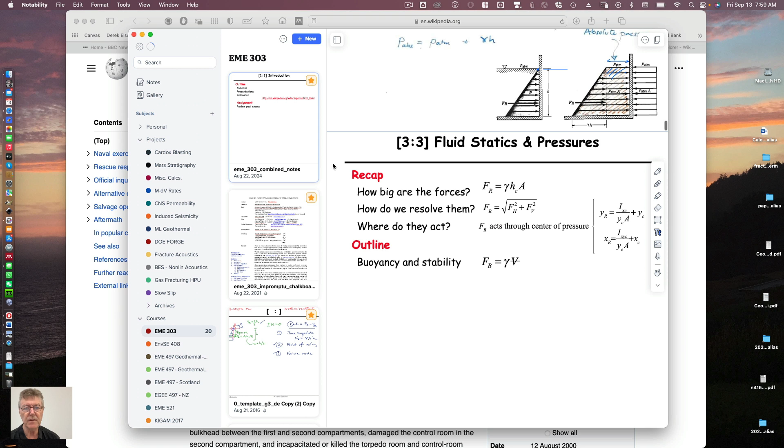Okay. What am I looking at? What's that? Doesn't sound... Yeah, fine. Wrong note. All right.

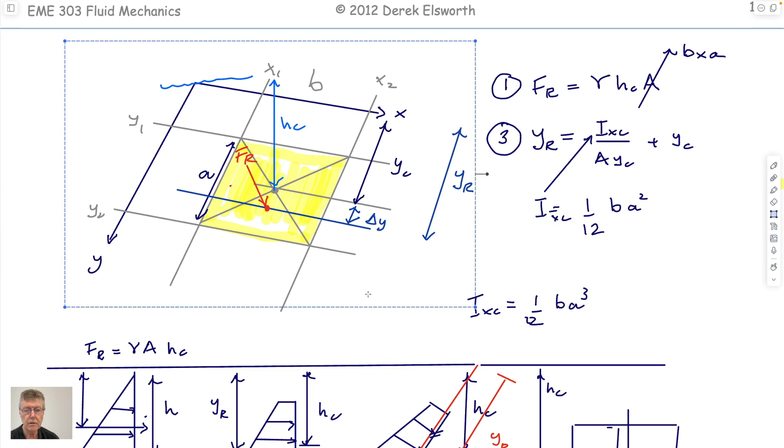So, last time, why don't I do this? It's useful to recap. Maybe I can do this. And I don't want to draw this again. You already have this diagram, but we can talk about it. So I want to do this. I'm getting pretty skillful, don't you think? All right.

Why don't I talk about it in terms of the last thing we actually talked about? So the last example we did, let's just do it from a perspective of what we did. Remember the gate that was hinged at the top, that was vertical, that had a bottom part, if I draw it to perspective, that looked like this. So big picture for this is to, I want to do this. And what else?

Right. So if we look at these individual components, this is the centroid of each of these plates. That is where we use to calculate HC. If it's aligned vertically, then this is YC, because it's in the Y direction. It happens also, if it's vertical, that it's going to be HC as well, right? Because it's vertical. If it's inclined, then YC is not equal to HC, but it is in this particular case. So that's where we calculate the magnitude of the force, and we use this centroid height here.

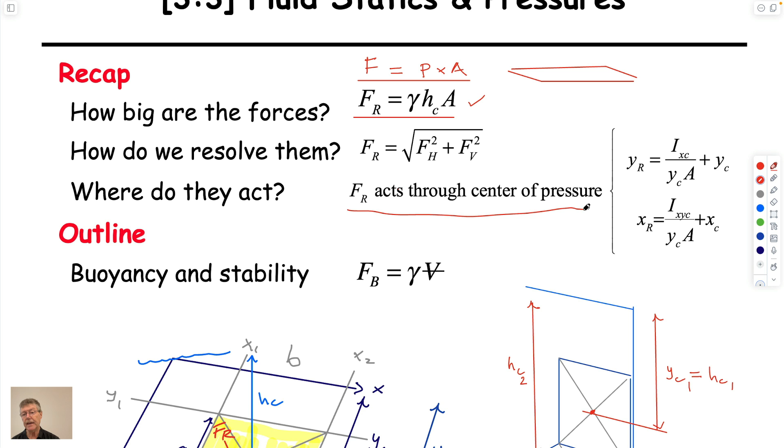In this particular case here, this would be, if this is 1, 1, and this is 2 for plate 2. This is the height to that, so we can calculate the pressures acting on those. And so we have that from this expression here, as you know. But, as we know, it doesn't act through that location. So we have to calculate the center of pressure. The center of pressure is given by YR, which is equal to, I guess, that.

This we can call delta Y, and this whole thing, even though I'm running out of space, is these two things added together. This is YR. And so the location where the force acts horizontally is F1 acts at this point here. Always symmetrically in the middle of the plane, just because you can imagine that there's equal forces acting on either side to try and swivel it. So it's down the center line of this.

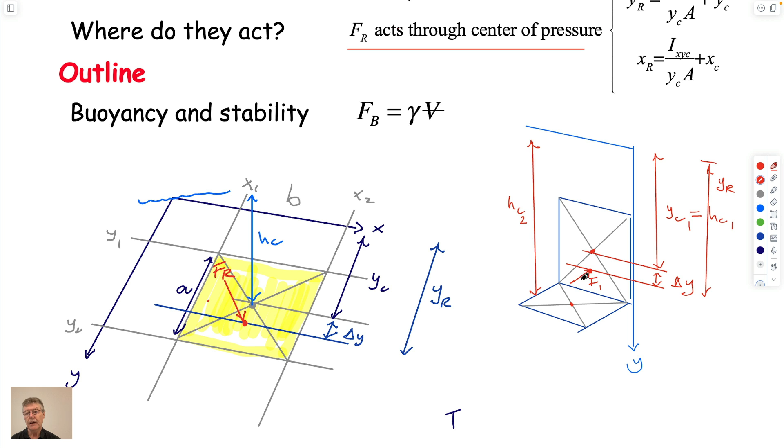And this magnitude of location is given by calculating this, which we can also write, if you like, as YR is equal to, it's already written. I was going to write it in two parts. YR is equal to YC plus delta Y, right? These terms here. Other way around, I suppose.

It will always be below the centroid. This is called the center of pressure, and it's the point where it acts. And we can always calculate it from this expression. If we calculate the magnitude of the force acting vertically at this point, we get force 2 from the location of HC, which is this.

And its point of action will be, as we explained last time, if the Y goes off horizontally to infinity, then on a horizontal surface, actually as we just said in the first expression, whether you have a liquid or a gas acting on this horizontal plate, the force is always equal to the pressure times the area. And for a horizontal plate, the location of action will always actually be the centroid.

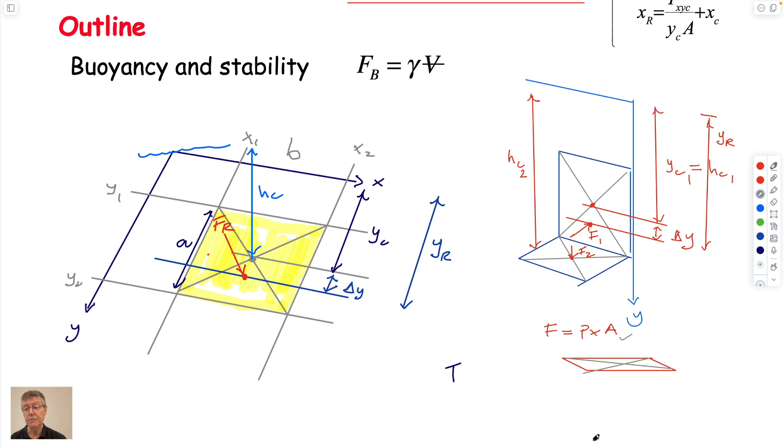So the expression above is what you might need next Friday. It's on the sheet already. You don't need the point of action. We said that it only covers weeks 1 and 2. But we did use force is equal to pressure times area within those weeks. And so that's all we need to know.

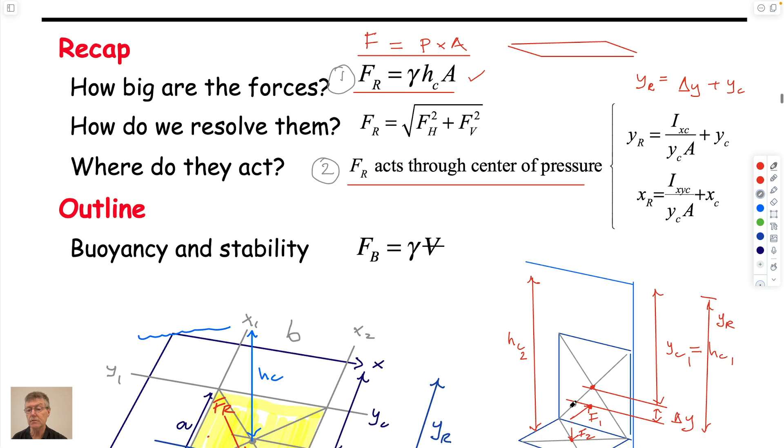And I guess the final thing, so we talked about needing 3 things. 1 is you need to calculate the magnitude of the force. 2, the location of the center of pressure, which is the point where it acts, which is given by this. And I guess the 3rd was a failure mode, if you like, right? And in that example, the failure mode was drawing a pivot that was here.

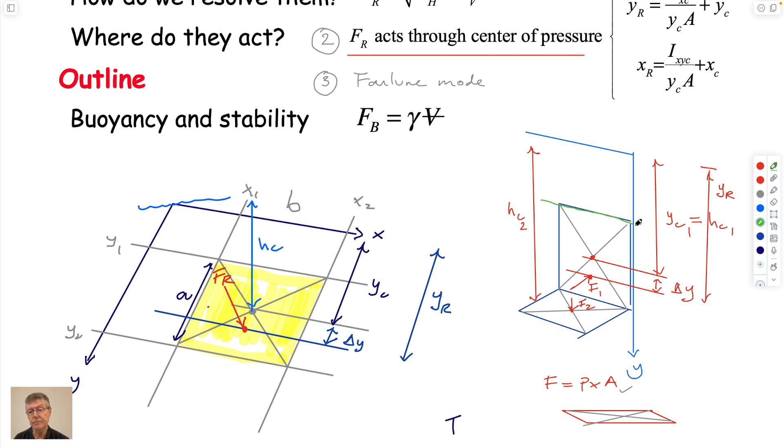And from that pivot point, we could do, quite simply, F1, L1. F2, L2. They both act counterclockwise. So to keep it closed, we need to apply a moment.

And so the moment we need to apply, actually in the question, the moment was applied by having a force in the other direction. It was called P, and it was by LP. I think that was the terminology we needed. So important for this third part is you have to prescribe a mechanism by which it fails. And so P times LP has to be equal to F1 times L1 plus F2 times L2. That's in a nutshell what we're trying to do.

I always worry about whether what I'm going to do now will confuse you. So if this makes your head explode, then don't worry about it. But to misuse the expression, there's more than one way to skin a cat, wherever that comes from, I'm never quite sure, is that we could solve that problem in a variety of different ways.

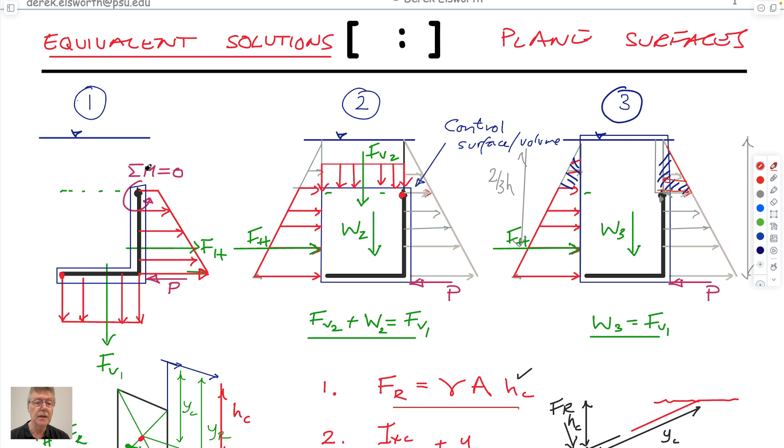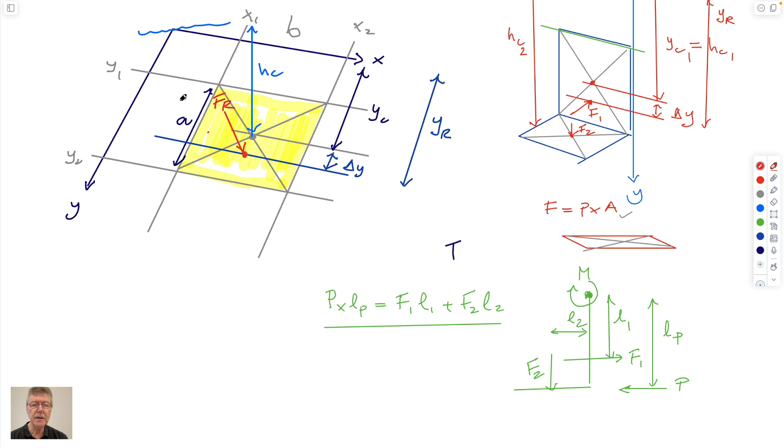Free body diagrams are our solution. Perhaps you thought that after statics you'd never use them again, but certainly in what we do in this class, it's kind of throughout what we attempt to do. So don't get hung up on that. It's just an aside, but only to make the point there are multiple ways to solve these problems. So these are the fundamental equations that we need.

We'll talk a bit about curved surfaces, and then after that we'll talk about buoyancy.

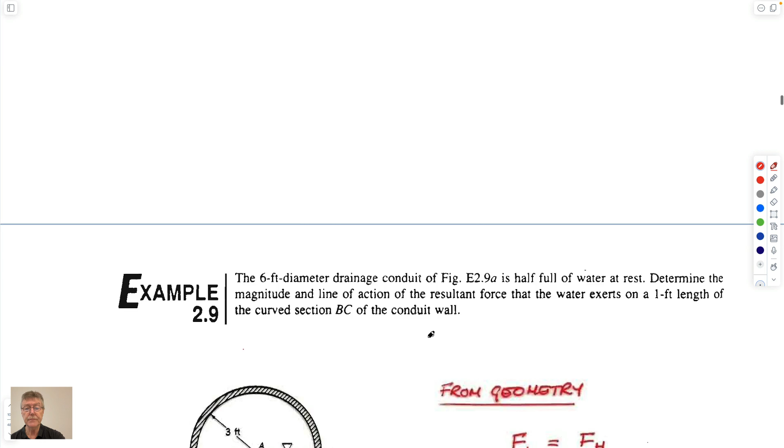These are super contrived problems. This is a stupid problem, but let's just quickly look at what it would be. Why would we want to divide a drainage conduit into half and look at the forces? Well, we might want to do it just because we can.

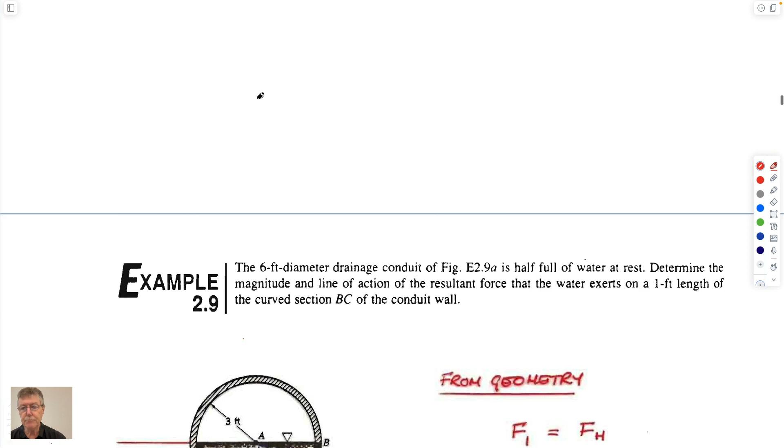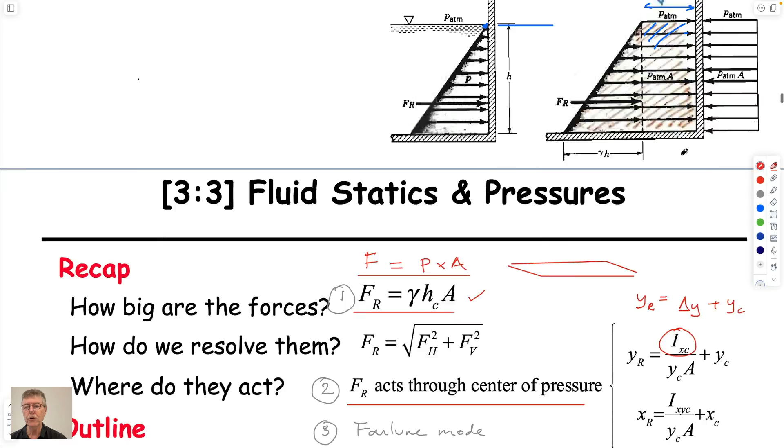So here's a static fluid in a circular section. I guess before we do that, I didn't mention, these are standard results. This is the second moment of area around the centroid, and they happen to conform to standard results, which you have in your book. If they're on a test, not on this test, but if they're on a test in the future, you'll have seen that these turn up in the question. So for a circle, it's a standard result.

For a plate, which is a much more usual one, we've used this already, it's a standard result. The centroid is always located directly in the middle. The centroid is a third up from a triangular distribution, from what we talked about before. It's a third up from every side, actually, as you know. And it's 4r over 3 pi up for a circle.

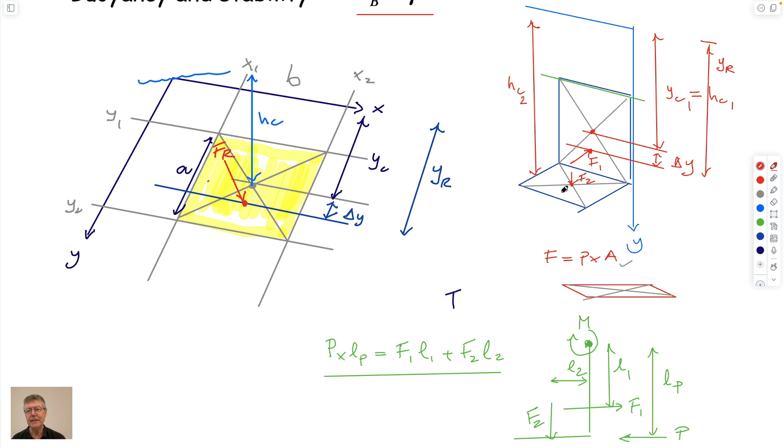So this is the point which would be the center of mass. If you have a circular disc and you're balancing it on your finger, the point that you'd balance it on would be this point here, the centroid in each case. And this would conform exactly to this gray-lined point in the middle of our plate. That's the center which the plate balances around. The point where the pressure distribution balances around, if you put it on my finger, is actually this other point. But perhaps that's confusing to talk about it. Egghead professor stuff. So these are standard results.

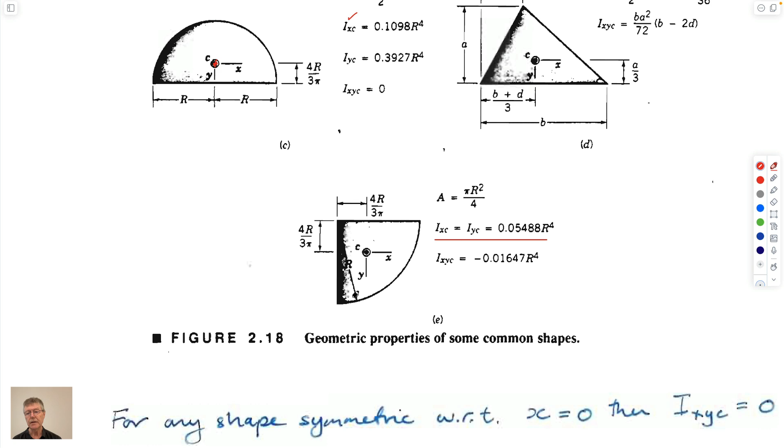So these are the terms that we typically use, we've used already, and that are in your book, and that we may wish to use in the future. Actually, we need to use this one now, right? So we know that this is equal to—actually, we don't need this, we need this one. So the balance point of this distribution is 4r over 3 pi in from the sides and the top, and we'll need that to be able to solve this next problem.

All right, so if we're stupid enough to want to do this, we want to calculate what the resultant force is that acts through this system. How do we do that? Well, we make a free body diagram, we cut it off. If we cut it off, then the pressure distribution on this side will look like this.

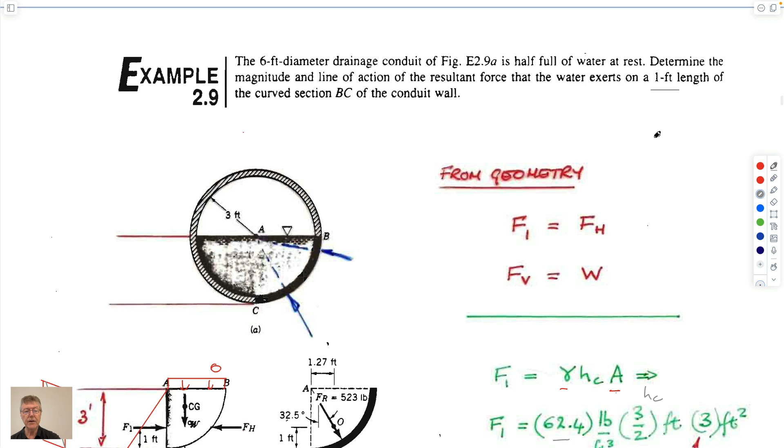This is what that looks like. I'll use gray again to draw the locations. So this is HC. HC is equal to 1.5 feet. Unit weight of water, never like these English units, 62.4 pounds per cubic foot. And the area, I think, is a 1 foot length. So the area here is 1 foot by 3 feet, which is this. Multiply those out, you end up with pounds.

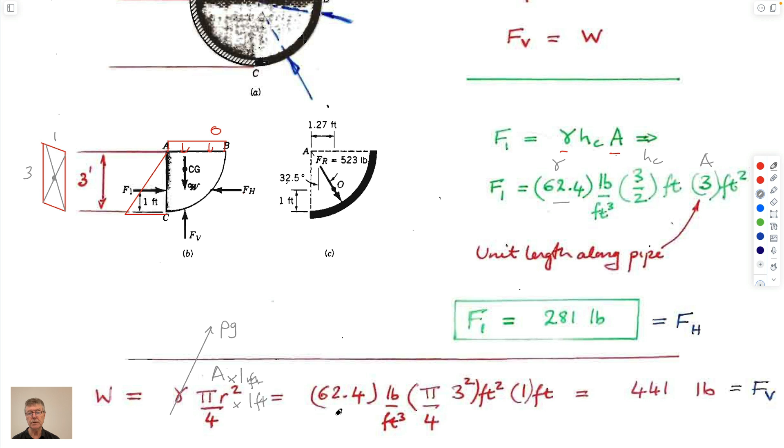The weight acting downwards is the unit weight. So this unit weight, as you know, is rho g. The area of a quarter circle is pi r squared divided by 4, times 1 foot into the page. And that equals whatever this is, 440 pounds, which is FV.

If we want to then take those magnitudes, we have FH, and we have FV, which is W. I guess if we had a superposed pressure on the top, which we don't, then we'd have something else. And so we know from those that we can use Pythagoras just to calculate the resultant of those two vectors, which is this, and we get FR.

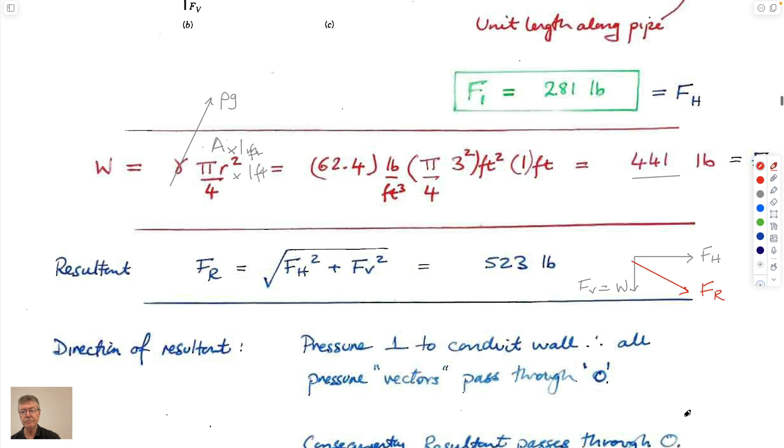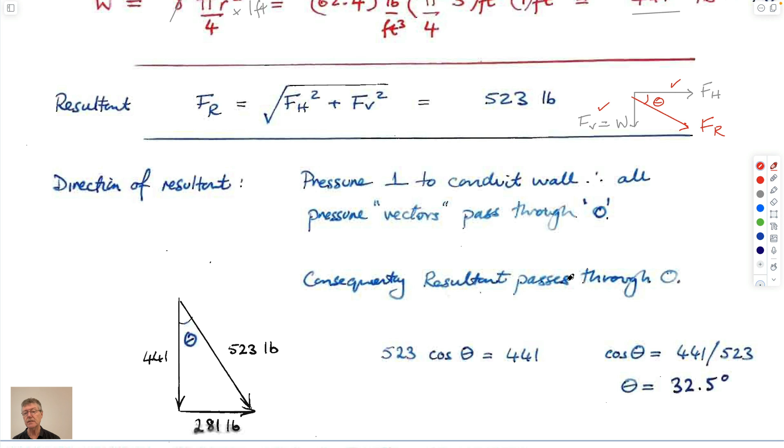And if we wanted to, from those, we would be able to calculate exactly what this angle is, just from sines and cosines, because we know this length and we know this length, and we can calculate this, and so the direction in which it acts is this. And if you wanted to, you could take these two forces and take moments around this central point, and you'd find out they exactly balance. So the resultant actually goes through this central point. I don't think that's an important thing for us to do here, but the rationalization of why that happens is that we know that pressures act normal to this surface.

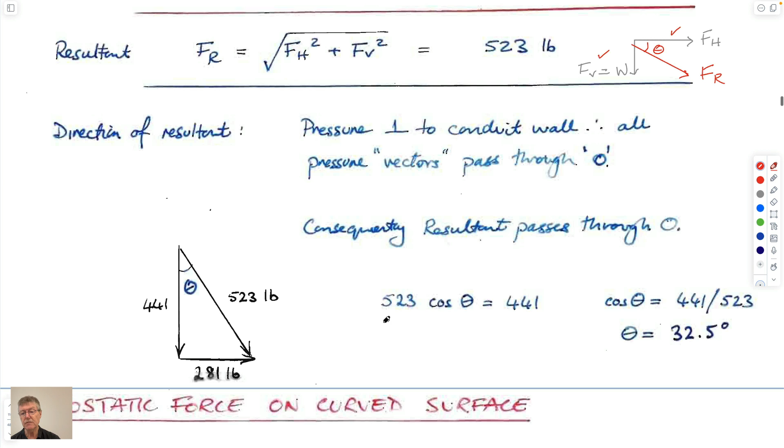And so all those pressures physically act by definition through this point here. So it acts at an angle which is defined by this, and we can calculate it using this expression here, just from these different lengths, and pull it out. So we know in this case that it acts through here, and we know that it acts at some angle, where this is the angle that we've just calculated here.

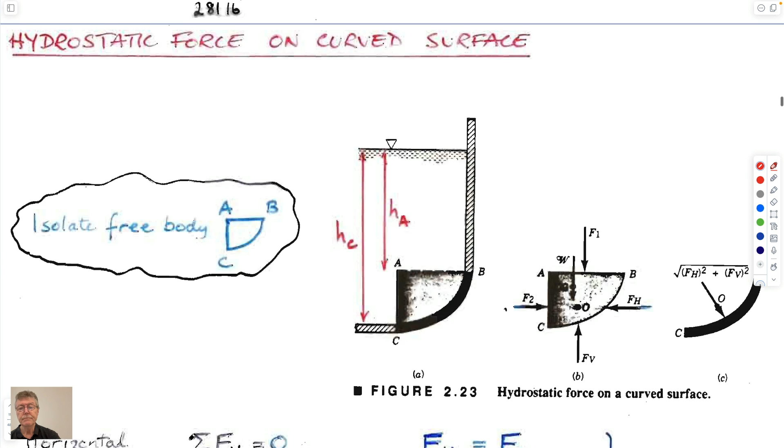If we want to do something fancier, I don't know whether I want to do this either. All we would do, actually it's just the same as the example we did before. Here we decided that we could solve this problem by looking at weights that are acting, and this weight has a pressure that's acting on top of it.

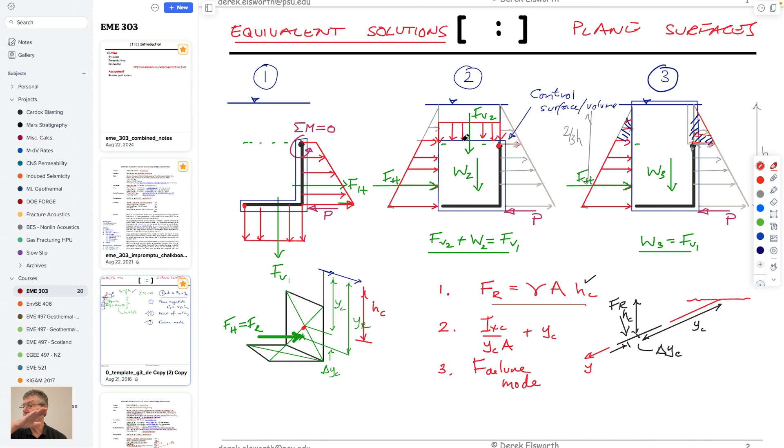We could solve this one with a curved surface, where instead of this right-angled gate, we have a curved surface. We have to calculate the weight of the fluid according to the cross-sectional area of the quarter circle. We have a pressure acting above it, which we can calculate what that vertical force is, because this is just going to be equal to the height of the centroid, which would be this depth here, times the unit weight, times the area on looking downwards in plan view. And we could use that to solve this problem. So I'm not going to do that.

So the relevance of this is that so-called tainter gates are structures that control water behind impoundments, sometimes in dams, sometimes this was at Bay of Fundy in Nova Scotia, as it turned out, many, many years ago, hence a black photocopy. But this is the gate, a very flimsy structure. You can see that these stanchions go to a hinge point somewhere in the future. It's got a very light covering, and this sluice just goes down to close off the flow.

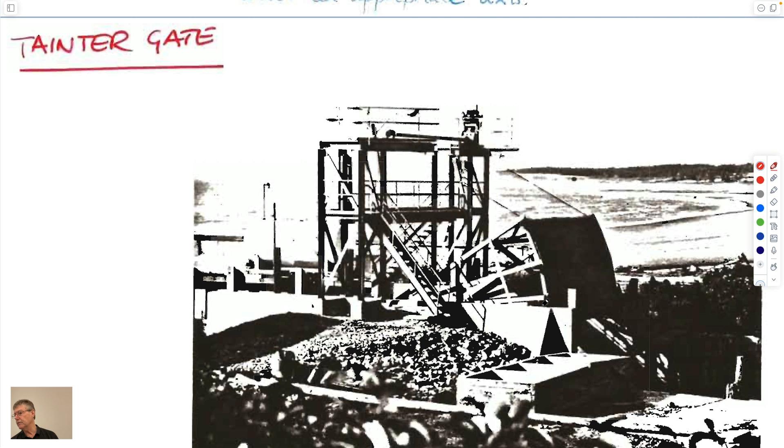And because when you have the pressure acting on the back of this gate, acting normally to this, it can be a very flimsy structure, and it works around a pivot point, but this can be a very light structure to be able to do that. And it can be a light structure including this because there's no net moment on this, because if everything is acting through this fulcrum, there is no moment that's applied on this. So you don't have to fight against it to raise it. You can raise it quite easily, raise it and lower it quite easily. Don't want to talk about that. These are too dangerous. Okay.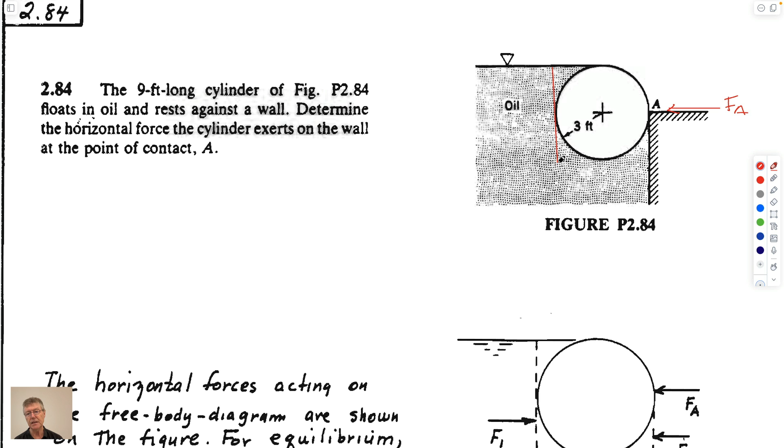I can see from below it's called FA. There's going to be a force on the other side. What you could do is easily just do this, as they've done below. And if you do that, then we can isolate this in terms of our free bodies.

Don't care about vertical in this particular case. It's a horizontal force, so vertical forces are orthogonal and have no influence. This is the force exerted by the wall pushing this back. You can imagine there's a bigger force on the left because we have a big force diagram. So what's the force on the right-hand side?

Is it this? No. Or is it... getting fancy here, right? Or is it this? So if this and this are the same, then this would be the pressure distribution we have.

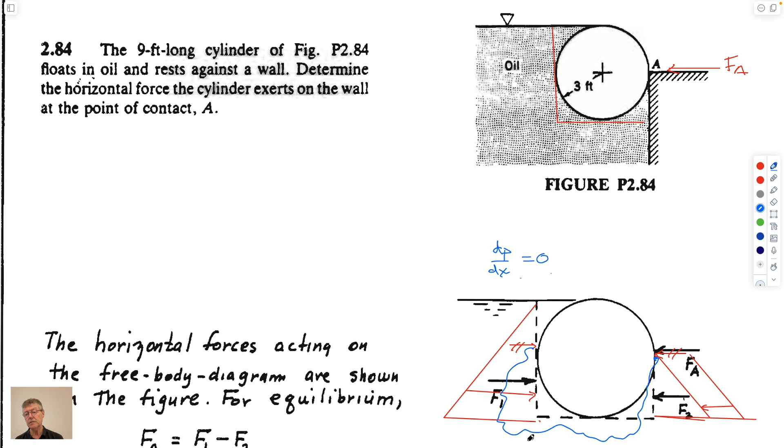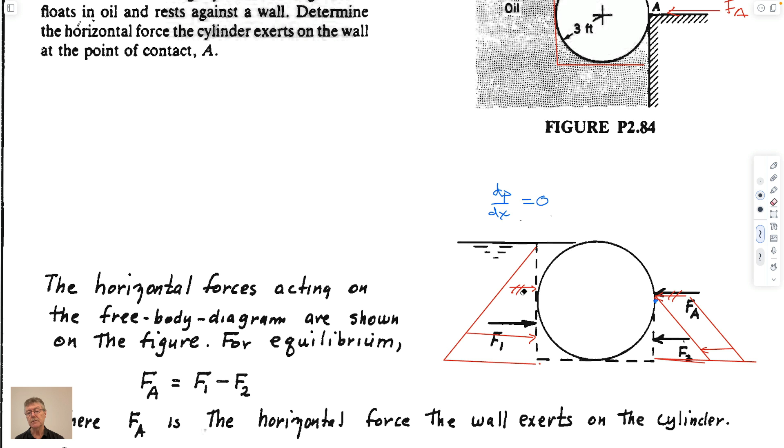It would be enticing at first thought to look at this pressure here and think, well, it's atmospheric above here, so it has to be atmospheric at this point. But what we do know is that if you go from this location to this location, they're exactly the same elevation. We know this expression says, just like the manometer equations, any location at the same elevation has to be the same pressure in a static fluid, and we can get from location one to the other this way. So the bottom line is that the magnitude of this pressure on this diagram has to be the same as this magnitude here.

You can solve it in a variety of different ways, but one straightforward way would be to think of this force as acting on a plate like this, where I do this. So you have HC and you have YR defined. The other one would be a plate, which I'm running out of space for, but would look like this - I'm not sure whether I can do the drawing justice. The plate would look... the vertical axis would look like this.

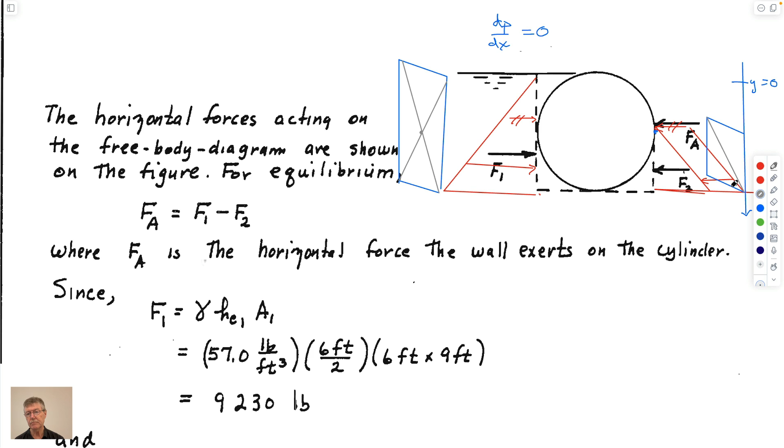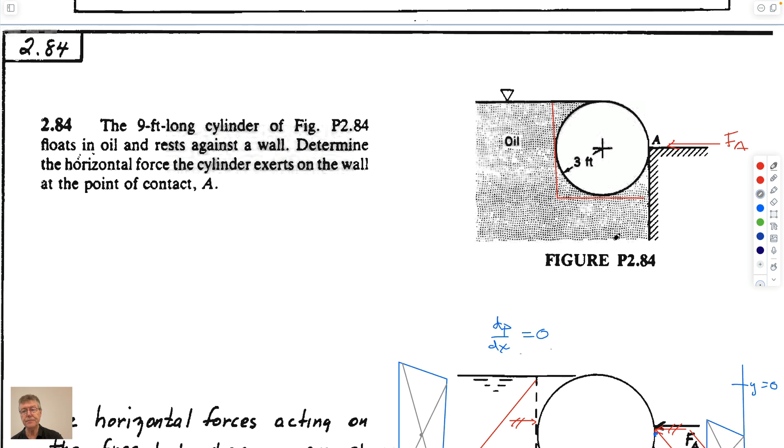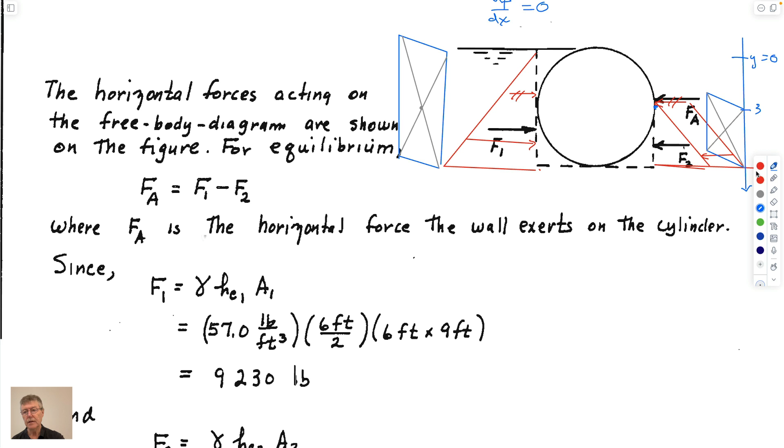Y equals 0, and the plate would look like... can you see this? So again, this would be below the surface. So what would the magnitudes be on this? The dimensions are: this is 3 feet, this is 3 feet, and this is 3 feet, etc. So if I put this on, this would be y equals 3. This would be y equals 6. I don't know where this has gone - where's my colors gone? Oh no. And this would be 4.5.

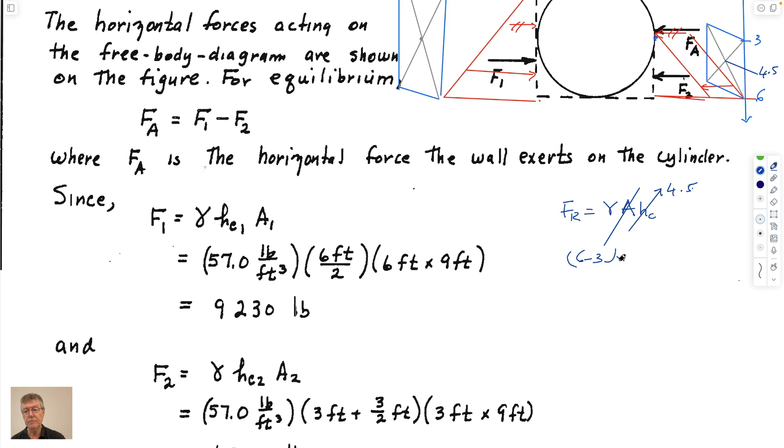So the resultant force would be equal to the unit weight of oil times the area times HC, and HC is 4.5. This would give you the correct magnitude. And what would A be? A would be 6 minus 3 feet, which is this height here, multiplied by the width into the page, 9 feet long.

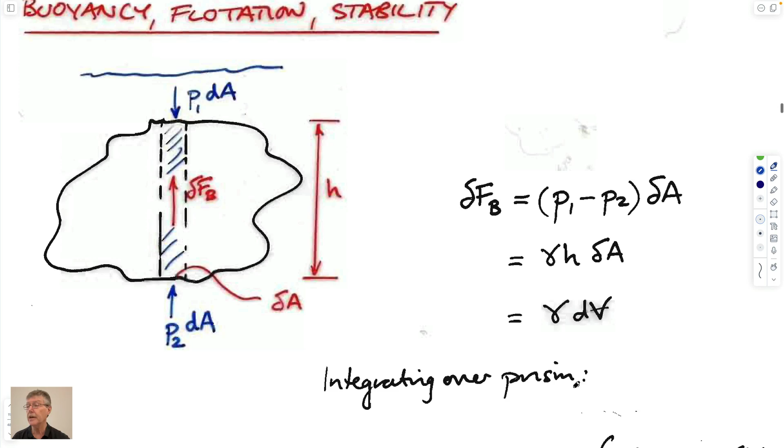Make sense? So you just have to figure out how to dissect these problems. Too much information again, showing that you can solve problems in lots of different ways - too complicated for what we want to do here. So there are lots of different ways to solve it. The only way you get a lead on this, I guess, is practicing it. You'll practice it in homework, so you'll get some chances to practice this.

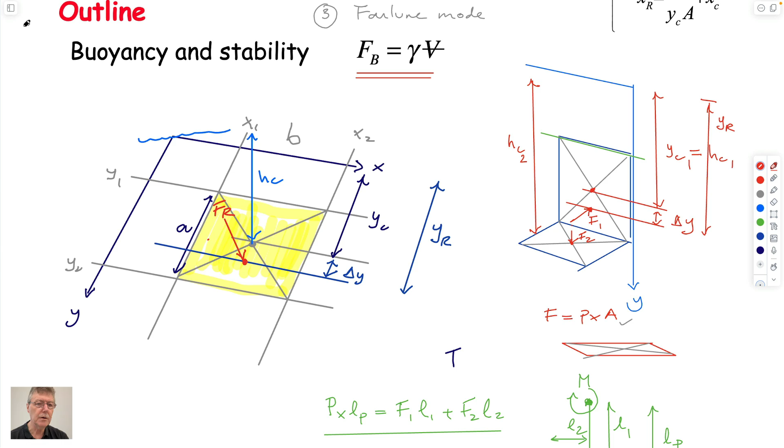The last thing to deal with then is to talk about buoyancy. If you came in late, well, why don't we go back - we have a bit of time. Where was it? U-tube.

So how does a submarine work? You obviously know how a submarine works - you go down, you take on water as ballast, you sink as a result of that ballast. You have it in your tanks. You have compressed air or some ability to store air, and you use that air to evacuate the ballast. The submarine is now less heavy and therefore is able to float by its buoyant weight, because all the people living inside are living in an environment at atmospheric pressure. We won't talk about that anymore - that's exactly how submarines work.

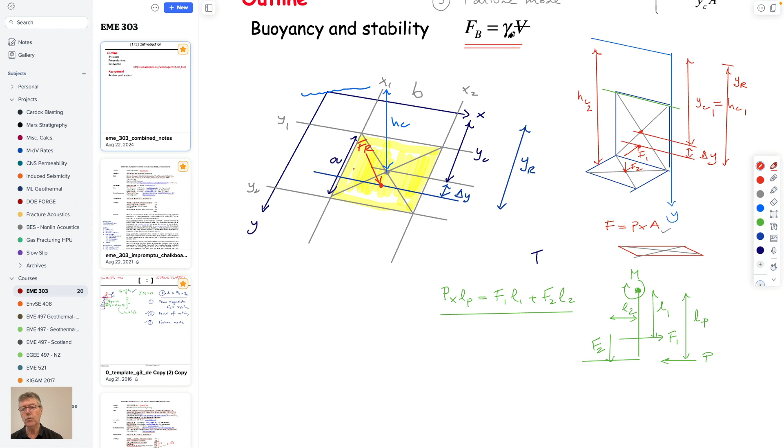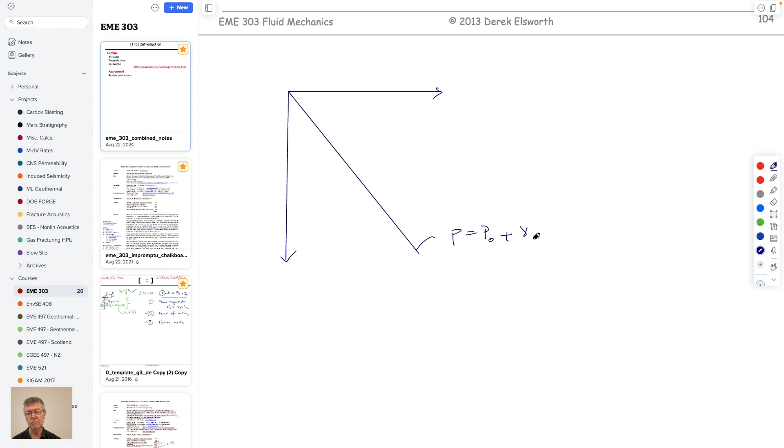So how does buoyancy work? You might know Archimedes' principle, that the buoyant force is equal to unit weight times its volume. It's quite easy to show that - the easiest way is by just doing this. We know that if we're working in our XY coordinate system, pressures change as a function P equals P0 plus gamma y, in this case, if this is y and this is pressure. If we do it differently, if we have pressures at two different heights, we have exactly this: P1, Y1, Y2, P1, P2.

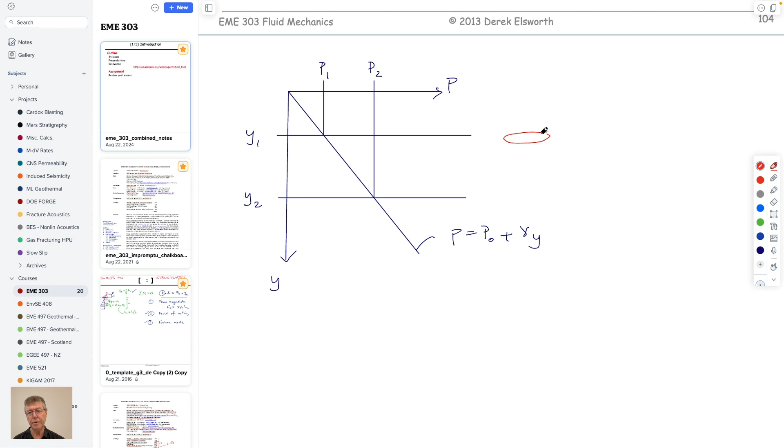And we can think about... do a circle. I like buckets. We have a bucket of fluid which has some weight W, has some cross-sectional area A. We have pressure acting on this, which is P1. We know that F1 equals P1 times A from what we talked about.

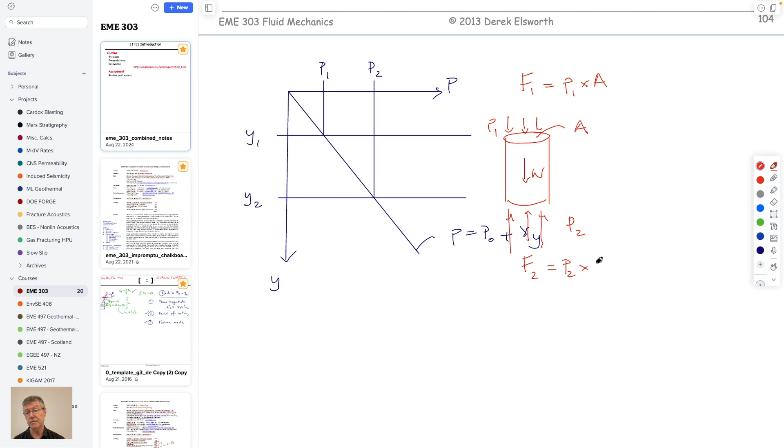We have a pressure acting upwards, which is larger, which is P2. And F2 is equal to P2 times same A. And we know from what we understand about statics is that F1 plus W is equal to F2. So F2 minus F1 has to be equal to W.

And we could think about this. This weight is why these pressures are able to be different. It's the same as we talked about stacking buckets to get to the height of Everest. You take fluid in a bucket, you calculate what the weight of the bucket is, and that force is what's holding it up. If you divide that force by the area, that's the pressure underneath it. If you add another bucket on top and another bucket on top, then this is exactly what you get.

And so if you take this weight away, if you can magically wrap it in a weightless membrane and take this water away, then all of a sudden it's not going to be in balance anymore. And so we could write this out as equal to P2 minus P1 times A. And we know that P1 is equal to gamma Y1. So this is also gamma (Y2 minus Y1) times A, which is W.

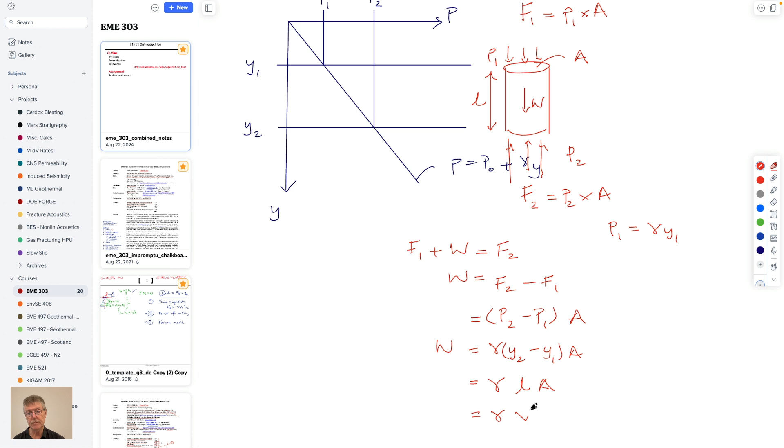And this is also equal to the unit weight times height times area. Should I use height? Perhaps I shouldn't. Let's use L. Right. If you subtract Y1 from Y2, Y2 is bigger, so this is L times A, and this is just equal to unit weight times volume. So this is the force that's keeping it in place. So this is just a static fluid that's fluid all through it.

So we encase this volume with a membrane, and miraculously we take the water out of it without the flexible membrane collapsing. And then it's going to be out of equilibrium. The magnitude it's going to be out of equilibrium is equal to the buoyant force. So W is holding it down. You take W out, it's no longer there. The net force acting upwards on it is going to be the buoyant force. Buoyant force always acts upwards. Always acts against gravity, officially, if you want to be pedantic about it. But for us, that's upwards. And so that's exactly what this expression is here.

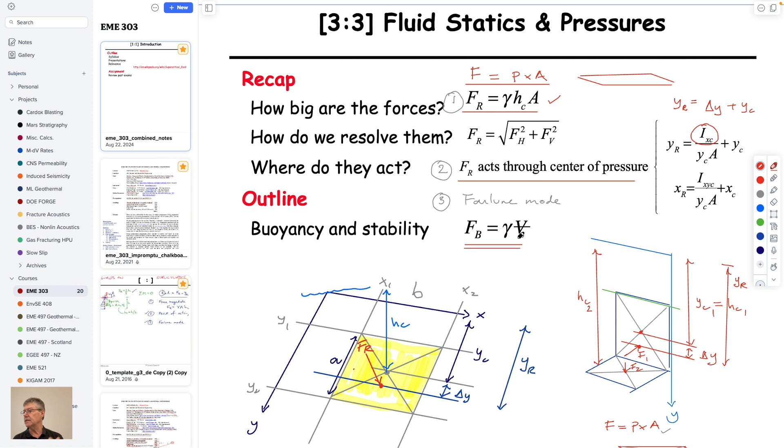And so if you know what the volume is of the submarine, if you know what the unit weight of the fluid is that's surrounding it, not the unit weight of the fluid that's in the submarine, but the water that's around it, then you know what the buoyant force is. And so if you take on weight in the submarine, then that would act against the buoyant force to keep the submarine down. So that's it. Simple. Pretty straightforward. Well, I think I've seen it a few times, so it's straightforward to me, it seems.

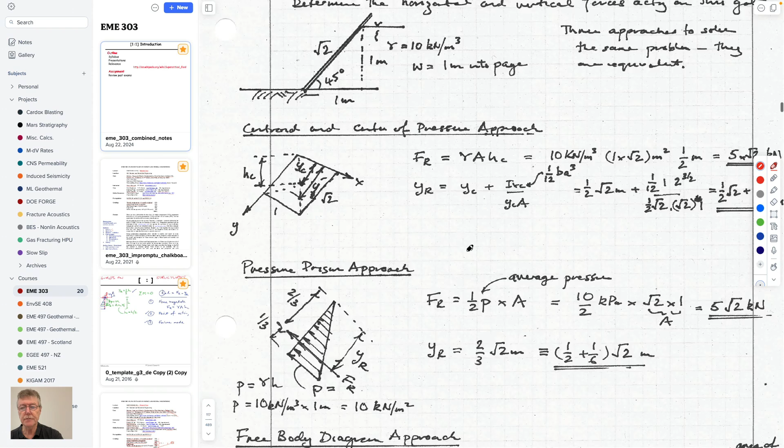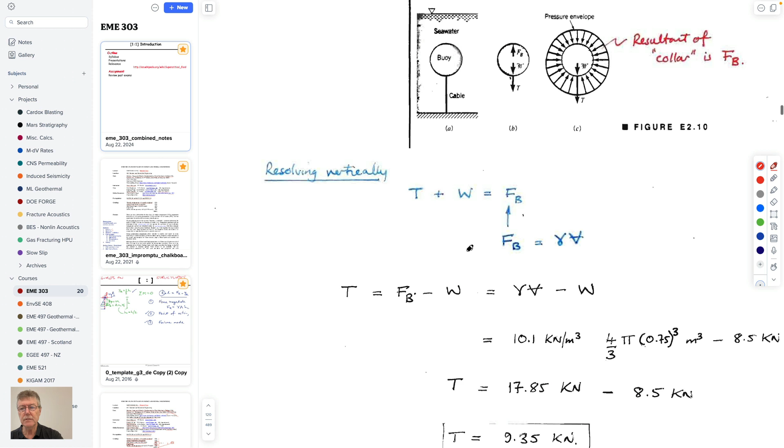This same analysis, blah, blah, blah. And so let's do a quick example and then talk about stability. So the quick example is this. From the book, which hopefully you have. So you have a buoy, and it has some weight to it. So if you took the buoy and carried it on shore, this big orange thing you're staggering around with has some weight to it that you have to hold. And so that's this W here.

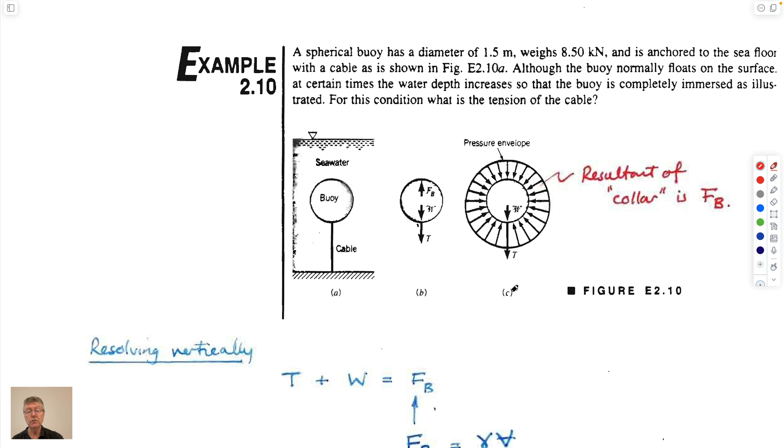And you put it underwater, you tether it with a cable, and you want to calculate what the force is that you have to tether it with to be able to hold it in place below the surface. And so it's just a force balance, right? Forces acting downwards are the tension in the cable and the weight of the buoy. Forces acting upwards are the buoyant force. The weight we have; the buoyant force is equal to the volume of the buoy multiplied by the unit weight of water.

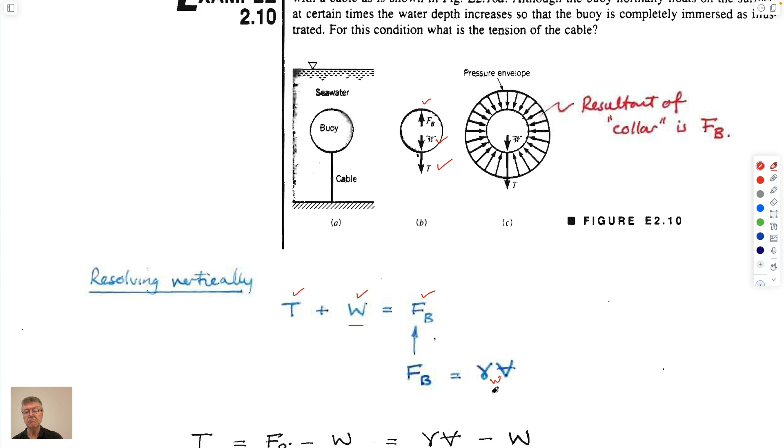And what we'd like to solve for is this. So we just rearrange it. Unit weight of water times the volume, seawater I guess in this case. Fresh water would be 9.81. Seawater, I think it's given in the question. Or perhaps not. Seafloor, yeah, fine. That's a minor wrinkle.

So 9.81 or 10.1. This is the volume of a sphere of radius 0.75 meters. And this is the weight that you're given, which is the weight of the big buoy. Not in terms of kilograms, but in terms of adding apples to apples. So everything is in newtons or kilonewtons, and you have to add them together, and you come up with this magnitude.

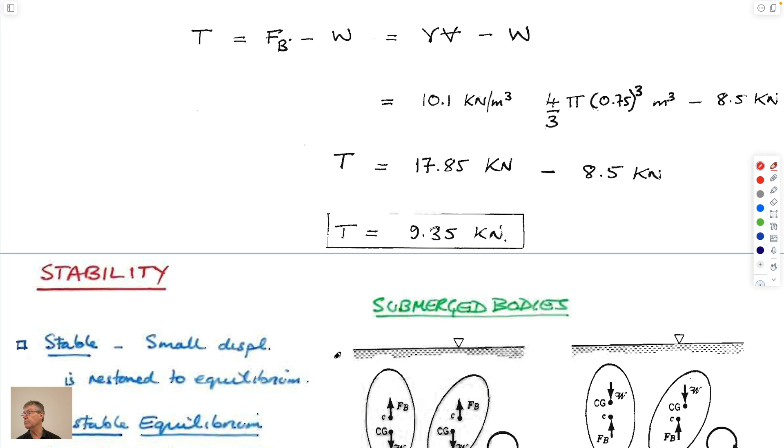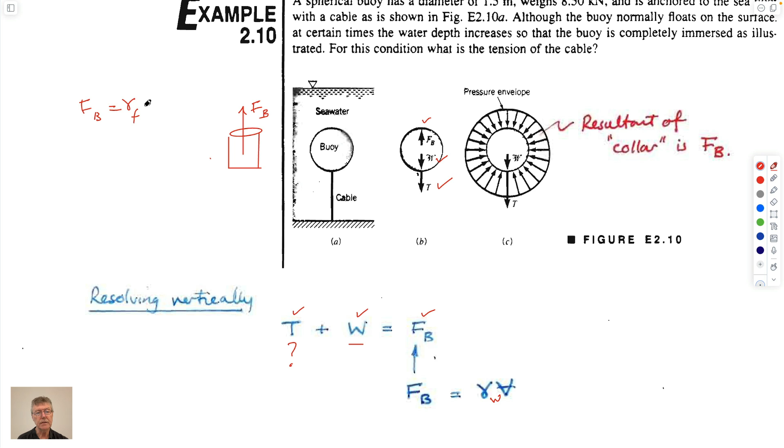It's worthwhile noting that, again, the little wrinkles on these questions, if this was our cylinder, didn't draw that very well, but you get the idea. If this is our cylinder, then the buoyant force is equal to what we said, the unit weight of water, or the fluid, multiplied by the volume.

And so in the way that we derived this, if we go back here, how far did we go back? Jeez. If the pressure acting on this surface relative to this magnitude here, the differences in these two pressures, is constant for a given height. So if you move this down, so maybe until it was at this depth here, the top, then the bottom would be at this depth here,

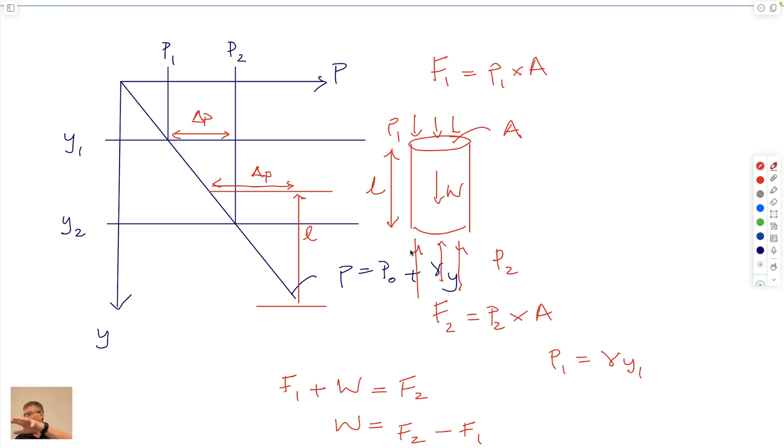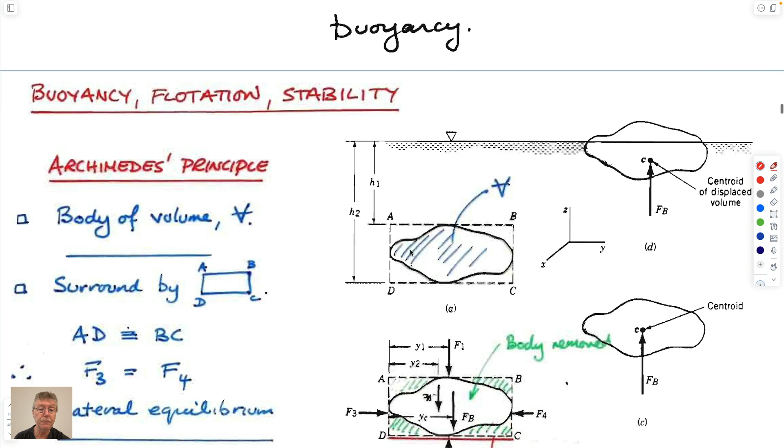then we'd know that the change in pressure between, this is still what we've called L, so I've just shifted it down, and now this magnitude of delta P is the same, right? This is delta P, this is delta P. This is the difference between the pressure on the top and the bottom. As we've translated it down, the height of the buoy hasn't changed, and so you'd expect that if you moved this buoy down, then it would still be the same buoyant force. That's why the buoyant force doesn't change as you go down in depth.

So in other words, if I was too clever for my own good, and I took this and moved it down here, the buoyant force doesn't change, because it has the same differential in pressure acting up. And the best way to think about it is that you're removing water, and really it's that volume of water, that mass of water, which is providing the weight in newtons that's holding this thing down. And so if you remove that mass of water, then that's the equivalent buoyant force that's rising.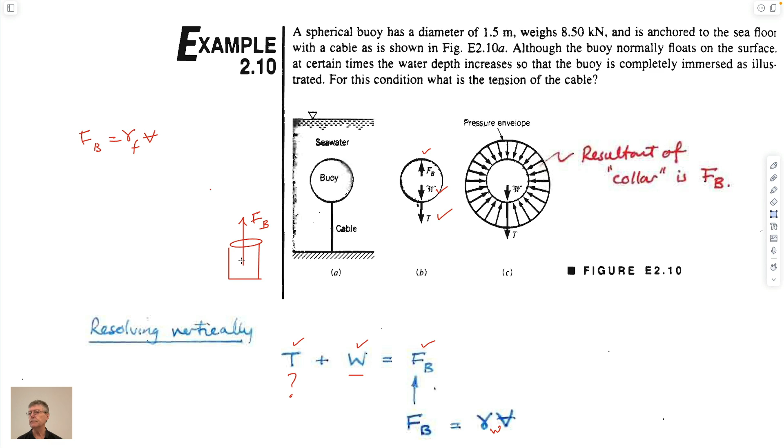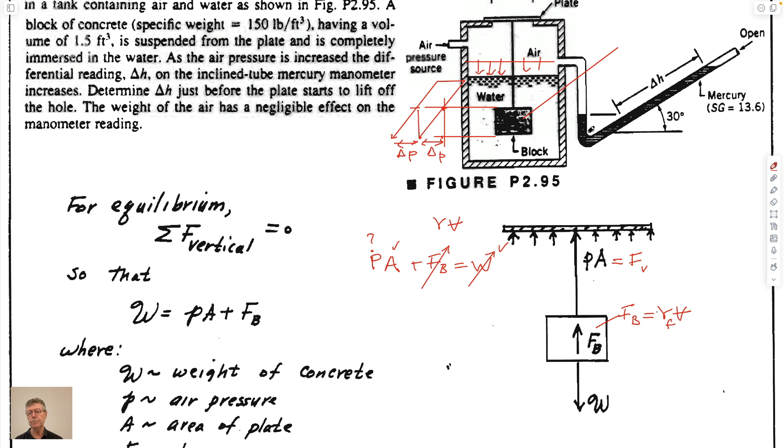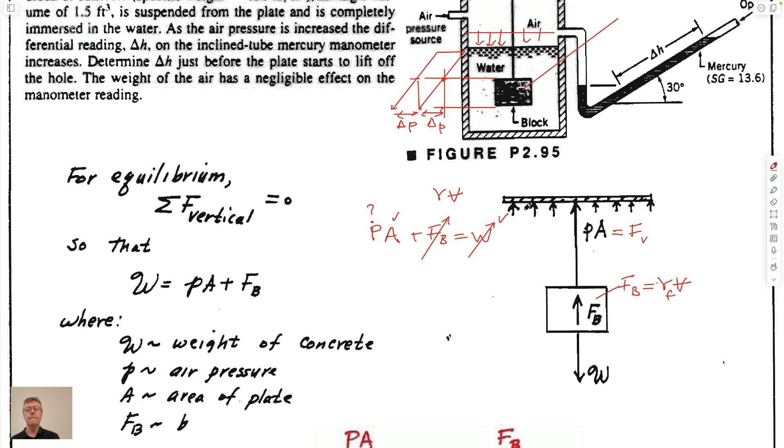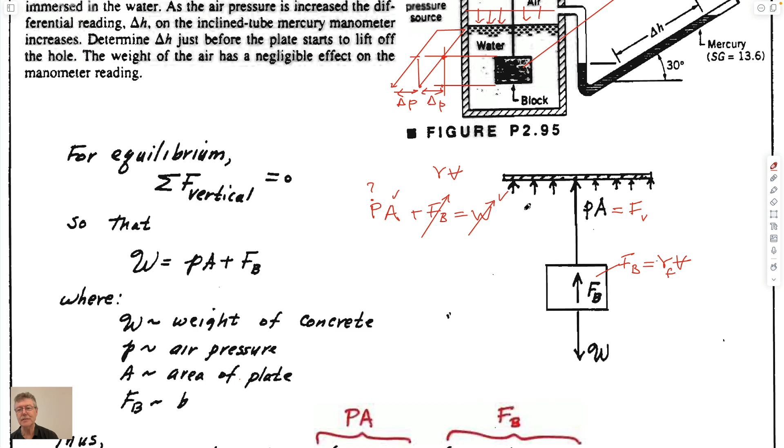And then when you want to solve for the pressure, it just makes it difficult for you because it wants you to just solve the manometer equation, but that's basically it. So that's buoyancy, pretty straightforward. Well, I shouldn't be so condescending to say that. If it's the first time you're seeing it, then it's perhaps not so straightforward. But you can always calculate these things. It's really getting the recipe. So one thing is to understand the expressions, but the other thing is to be able to apply them.

So that's buoyancy. Buoyancy is always given by the unit weight times the volume that's displaced of the fluid that surrounds an object. Whether it's an empty object with air inside or a solid object with solid inside, they both apply. The other interesting thing in talking about buoyancy is stability. We all know that if you have a sailboat, you put a lead keel in it so that it stands upright when the wind's blowing, and that is a problem in stability. And so we can look at how stable objects would be that are buoyant.

The first ones we can look at are the simplest ones, which are fully submerged, like a submarine. So if this was a submarine and we had lead in the bottom of the submarine, then the center of gravity of the submarine would be displaced downwards below its midpoint. The center of buoyancy, where the buoyant force acts, is always the centroid of the volume.

So the analogy with our, bless you.

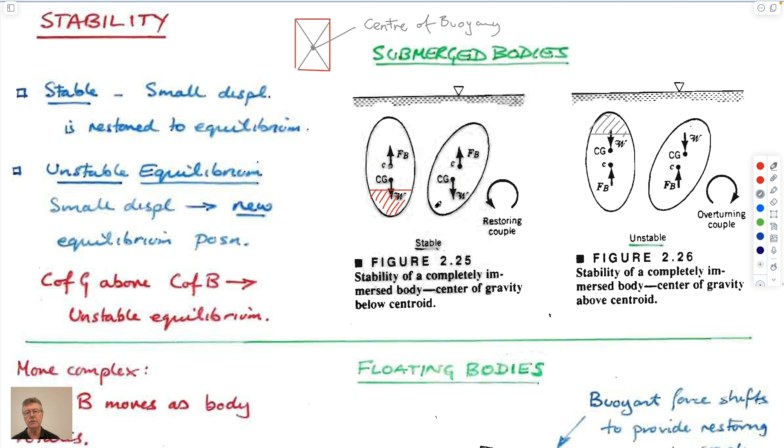That's the easier one. The more difficult one is when you have a free surface, because the center of buoyancy depends on the submerged profile. So the submerged profile for the center of buoyancy in this case is this, and in this case is this. So clearly, if this is changing as it rotates, then the center of gravity isn't going to change for this figure, but the center of buoyancy is going to change because it's the balance point of this gray cross-sectional area.

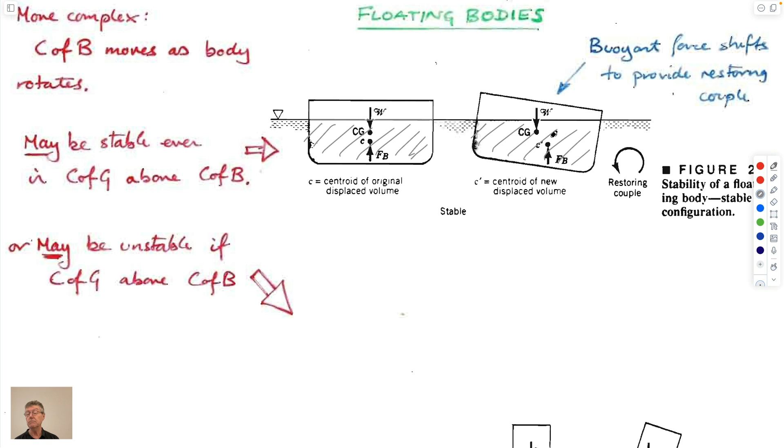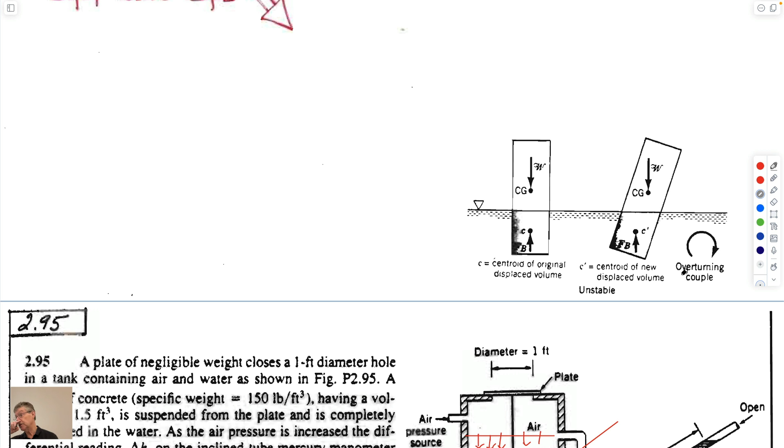So again, the same principles apply. If you have a wide boat and you twist it, now the center of buoyancy tries to restore it, doesn't capsize. If you imagine having a boat which is sitting like this, if you twist it, the center of gravity for the weight is above the center of buoyancy and offset, and so it will try and overturn it, just like the Costa Concordia that we looked at. Okay, so that's it.

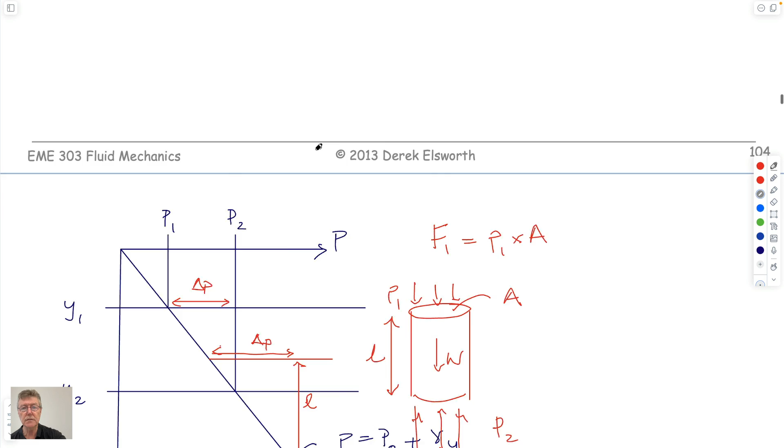So the expressions for this week are the ones on that first sheet. That's all you need. You don't need those for next week, as you know. I'll say a few things about the test. If there are questions, I'm happy to answer them. But from this week, these are the fundamental expressions that you need. So these will turn up in a future incarnation of what we deal with in tests.

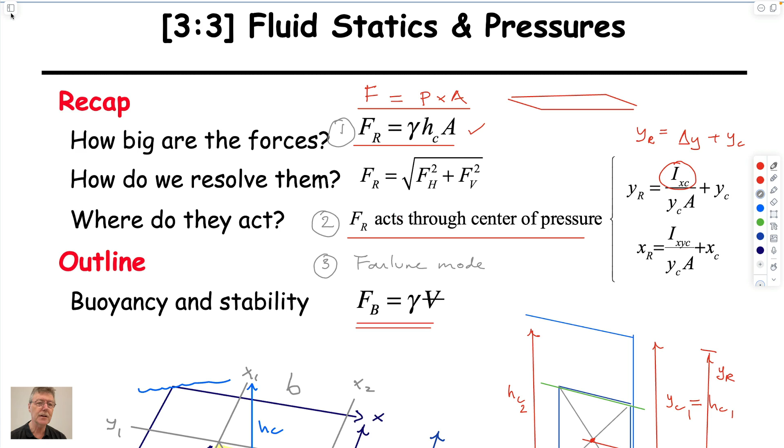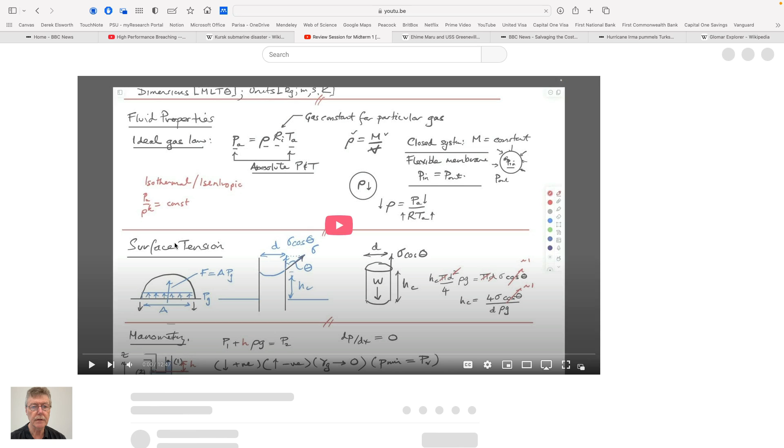Test. Well, I will do this actually and record it for those who... I still get questions as to what is happening for the test, even though we've kind of talked about it. You know, if you're here, that our test review is online. And so you can review that. You have some idea of what it's about.

It's in this classroom. It's on Monday and Wednesday and Friday. There are three different sets of questions on those days. You might get here early. They might start things up at 7:55 if you arrive here. The couple of people who are doing this in quiet circumstances, because they're allowed to by the university, will get it served to them on Canvas. That will also open at 7:55. It's a 30-minute test. It'll stop at 8:30 or 8:31.

Each question, just like the post-COVID questions from 2020 onwards, is a question with sub-questions which hopefully don't lead on from each other. They're not multiple choice mainly. There might be one or two out of the 6 to 8 on a single test, but most of them are calculations to put in a box. You're asked to put those calculations in particular units. You'll have the test and an equation sheet. The equation sheet is the bottom of this video, which you'll get verbatim. The back of it you can use as scratch paper.

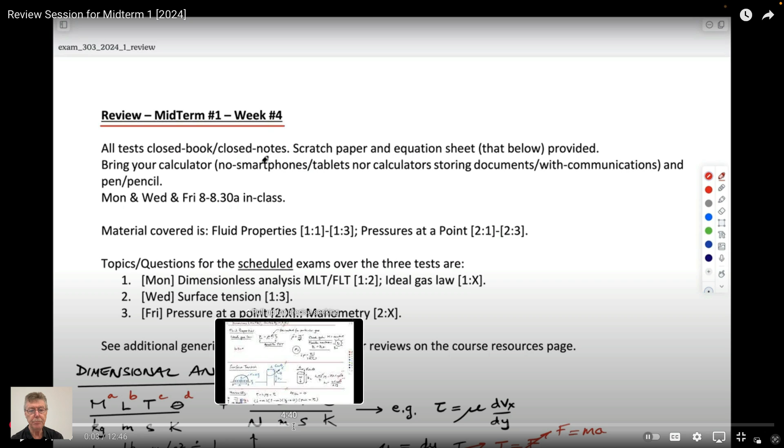Yes? So for the equation sheet, the video kind of just goes over everything, so would the equation sheet just be all the handwritten equations? Yes. It's verbatim. We're not going to play a video for you. It'll be a PDF. I've got a PDF of this whole page. I asked Junpeng if he could figure out how to project it on the screen. I'm not sure whether he's going to do that or not. I was going to say something else before, which I can't remember now.

Oh, so the answers, they're not really multiple choice, they're numerical answers. You're asked to report them in units, as you've seen in the ones that are post-COVID, which is 2020 onwards. So use those units. I imagine that if Junpeng's doing it by hand and you get that wrong and do it in kilonewtons instead of newtons, then he might cut you a break. The answers are plus or minus 10%, so that's a fair latitude. We did that because they were exact answers on Canvas in the past, and so we'll keep with that. And yeah, I don't know what else to say.

Look on it as an opportunity. I never used to like making presentations. I know that the best presentations I make are when I know my stuff dead to rights, and I'm excited that people know what my research is because I'm going to tell them about it. If I'm nervous about it and I think it's crap and I'm not really wanting to talk about it, then that's when I don't like making presentations. So I think that's the same for tests. Prepare for it, come in confident, be sure of your material.

The last two questions are kind of copies of previous test questions, and they're actually both pre-COVID, 2019 and before. That's a lot of tests, so that perhaps doesn't help you. And they're not as long. Tests before COVID were much longer. The ones after COVID get you to calculate this, and then this, and then this, rather than saying you need to solve this problem of the force on the gate, and you have to incrementally do this.